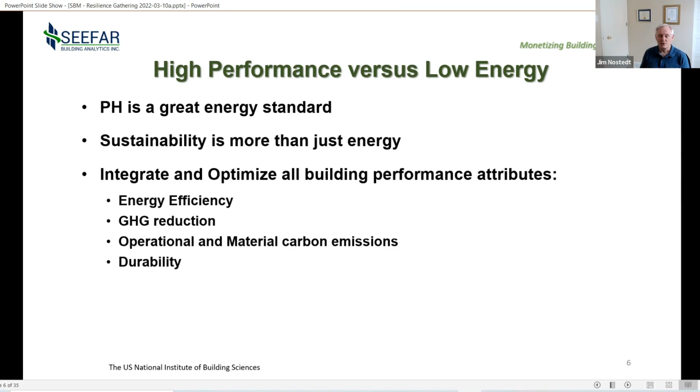So sustainability is more than just energy, but what we really need to do is integrate and optimize all building performance attributes, energy being one, greenhouse gas reduction, operational and material carbon emission reductions, the durability of the materials that we use for the building, the maintenance and renewal costs, the life cycle performance, how long is this building going to last, and how long are the materials that we're using going to last. And if we're deconstructing a building to build this, we should think about that. And finally, I think one of the most important ones is occupant comfort and productivity.

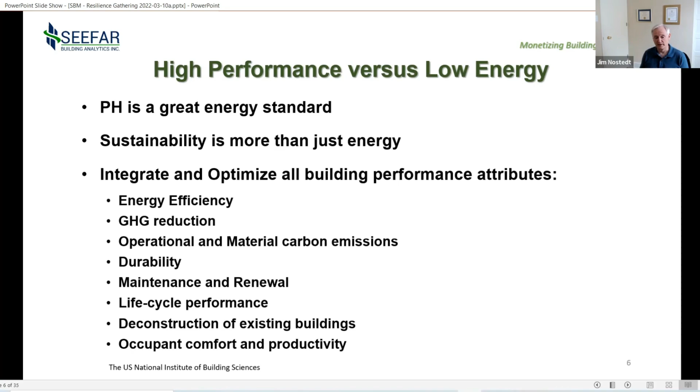And because the occupants, or the people that work in the building, impact the building in a big way, but the building also impacts them. So what are the objectives of our SEEFAR valuation? Well, first of all, to optimize the whole building investment, reduce the material and operational carbon emissions, reduce the total cost of building ownership. And what we're going to see is that new high performance buildings have much higher value than code built, and also that deep retrofits can achieve net zero ready with higher value than the existing buildings over their remaining useful life.

So who wins? So what are the benefits to the building owners of this? Well, if you have a $1 million building and it has a 60-year life, you're going to spend $7 to $10 million in operating and maintenance costs over that time period. We know from experience we can address about 3 million of that $7 million. And I think there's more opportunity there if we work at this a little bit. And what we see is that we can save 30 to 50% of that $3 million, which is roughly $1 million over the 60 years. So you spent $1 million to build the building, you're going to save $1 million in life cycle costs over 60 years. Pretty significant savings.

What occurs in addition to that is that you have protection from future utility rate increases and rising carbon prices. Your building should have a higher asset value that outperforms new code built buildings or existing buildings. And there's still more potential savings here that we haven't investigated. And I think that will come with more experience as we do this.

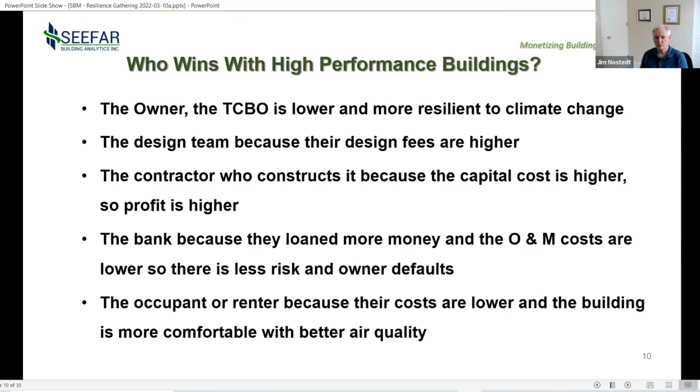The bank wins because they've loaned more money and the O&M costs are lower, so there's less risk and less chance of owner default. And in a few minutes, Dennis Cunningham is going to talk about borrowing for green or high performance buildings. And certainly the occupant of the building or the renter wins because their costs are lower, but they've got a building that's more comfortable with better indoor air quality. And certainly the planet wins.

So I'm going to give you an example. This is a building in Ontario. It was built as a code-built building. It's a good-sized building, almost 21,000 square meters. It was designed as a code-built building for about $58 million. The owner said, well, what if we made this a passive house building? That bumped the cost to $58.6 million, which is about a 1.2% premium. And then if we added solar panels on it, it'd be a 4.8% premium. So what we're doing here is we're comparing the base case code-built building to a passive house design building, and then a passive house building with solar.

And if you look at the life cycle cost, the 60-year total cost of building ownership, you say with the passive house, we've saved $45 million. And then if you added the solar panels on, that savings goes to 73 million. Just think about this for a second. You invested $60 million and you got back $73 million in savings. Very, very significant.

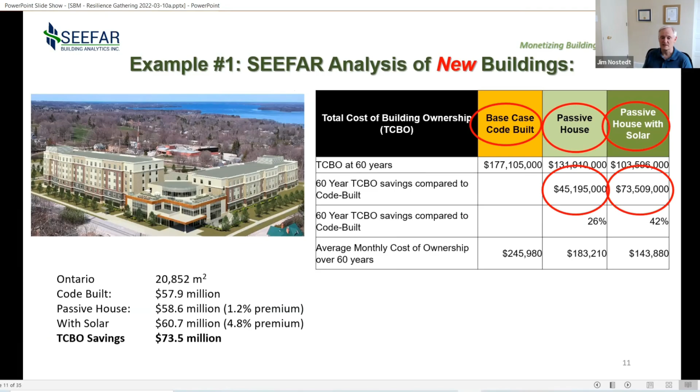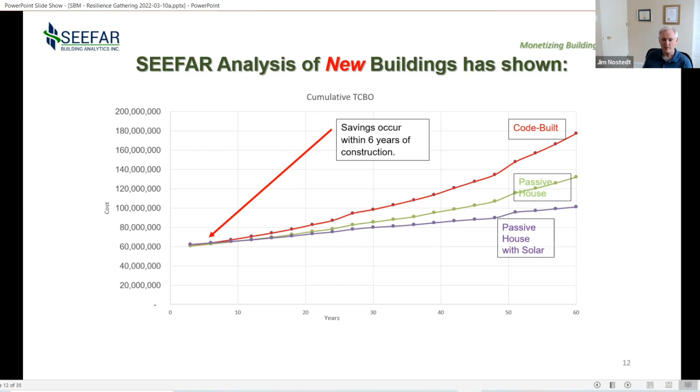Now, that's highly unusual. In this case, the builder was building this home for himself. He put a lot of extra care into it and made a pretty substantial building. But let's look at the results. Again, we're going to compare the code-built building to the high-performance building.

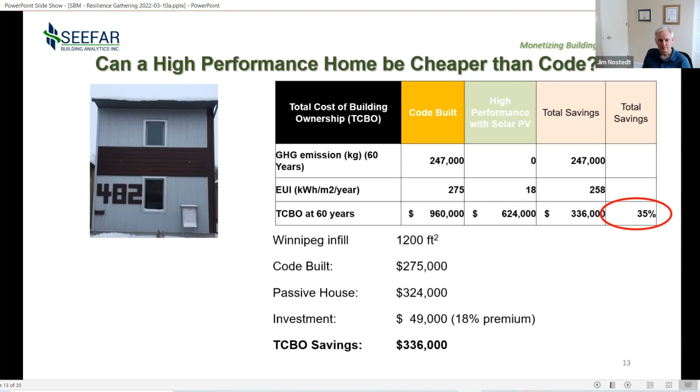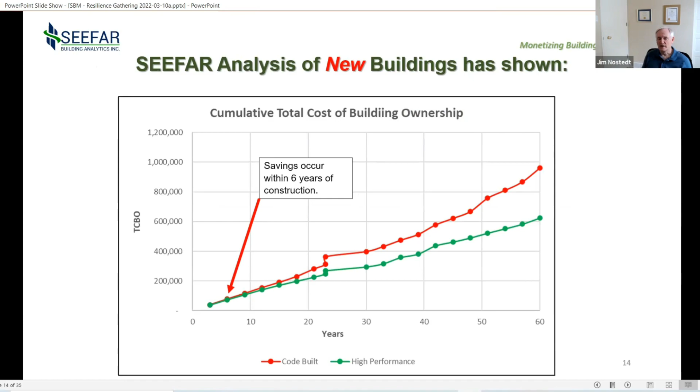So far we've just talked about new buildings. Let's go and look at the situation with existing buildings, because existing buildings are the big problem. I think the number is something in the order of 15 million single family homes that need to be retrofitted, and that doesn't include commercial buildings.

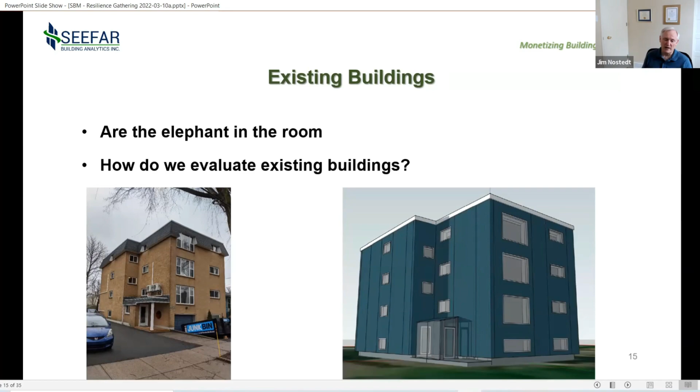So let's look at the numbers. So again, comparing the existing building to the deep retrofit. We've reduced the greenhouse gas emissions essentially to zero, the energy to zero, but let's look at the savings. We've saved $1.5 million or 37% over the life of the building.

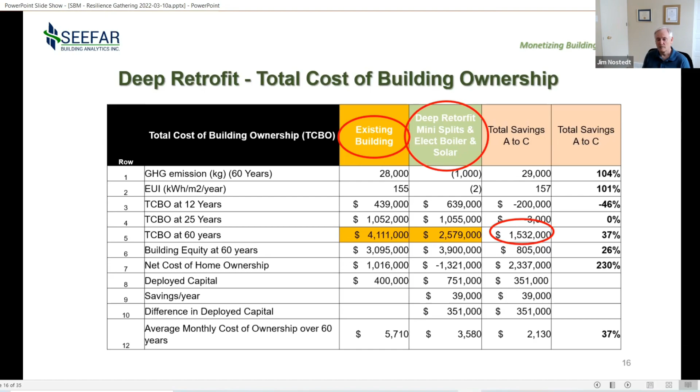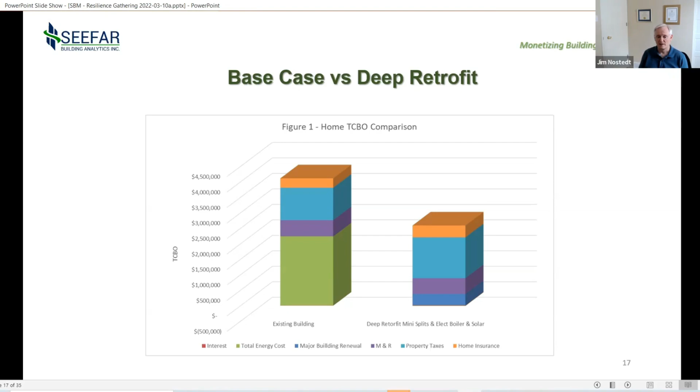And the other costs have gone up slightly because we've had to maintain the solar panels and those kind of things. And the property taxes, we've shown an increase, but that's not always necessarily the case, depending on the jurisdiction. But pretty substantial savings.

Well, let's look at the total cost of building ownership curves. Again, the red line is the existing building and the green line is the retrofit. But notice these lines are not crossing until year 27. We still saved $1.5 million or 37%, but people say, well, I don't want to wait that long to achieve the savings. So let's look at another example.

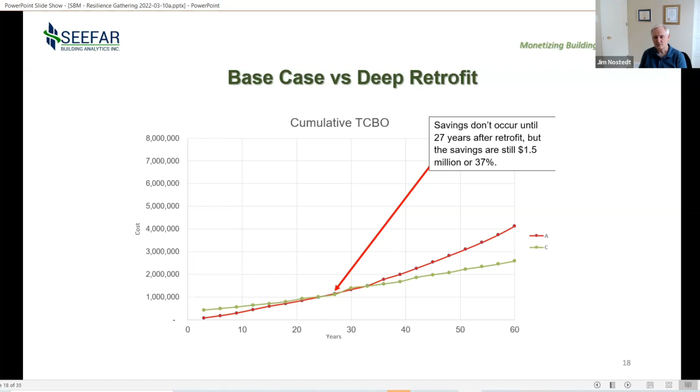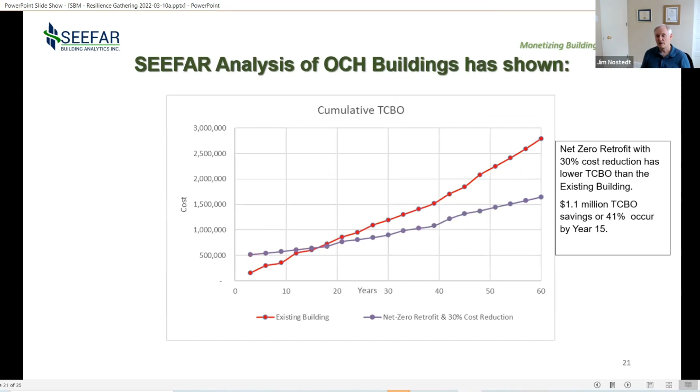And so we went back and we looked at this building and said, where can we save money on this construction process? Because it was a very first project, a pilot project, and initial costs were pretty high. And what we found was that by looking at each individual building component, we could probably save in the order of 30% of the construction costs.

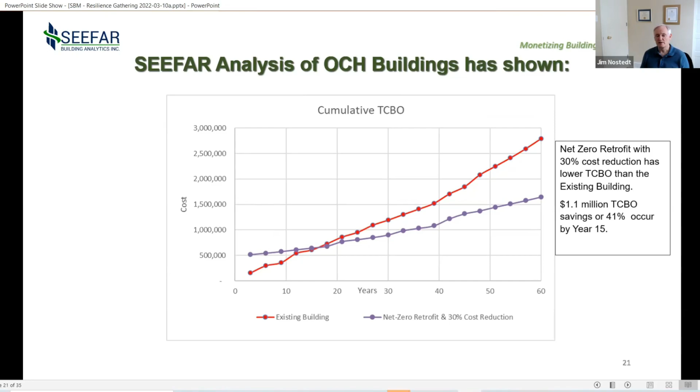And that increased the savings to 1.1 million, and it brought where the curves cross down to year 15. And what we have not included in this analysis at this point is the improved value of that building. And we believe that we can get below 10 years if we take that analysis into account.

So what did we gain out of this? Well, first of all, adding the solar panels to the deep retrofit saved $1.5 million over the 60-year total cost of building ownership. But the order of optimization is important. And the first thing to do is reduce the building load by adding the panels on the outside and then using more durable products to do that. And we've realized in this, and I've shown the example, that we need to reduce the cost of the retrofits. And we see that that's possible.

The next thing is you want to get off fossil fuels. That means electrifying, but it also means that you're probably going to end up using heat pumps because that will reduce the energy costs. Natural gas is about 1/3 of the cost of the electricity, and because you have a coefficient of performance of 3 to 4, the heat pumps will bring you back to reducing that cost. And now you've reduced your greenhouse gas emissions essentially to 0.

And then the last thing you do is add the solar panels on. And the reason you add those last is you've reduced the building load dramatically. That means you need less solar panels, which have less capital cost, but it also means there's lower operating and maintenance costs. And you need to start this optimization process at the beginning of the project. The earlier you start it, the more opportunities you have to reduce the costs.

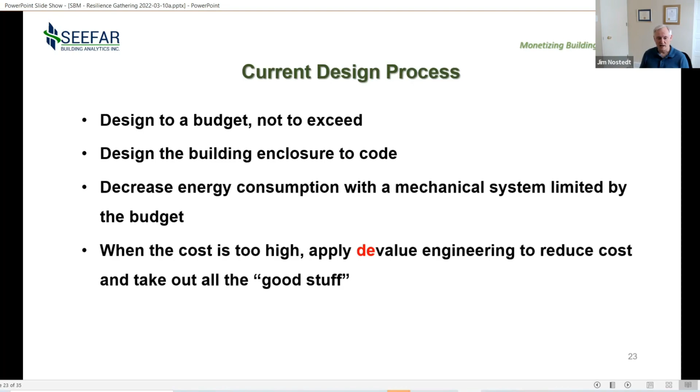Also wanted to talk quickly about the design process that is currently going on. Most people are designing to a budget not to exceed. They're typically designing the building enclosure to code. And then what they do is they try and decrease the energy consumption with a good mechanical system, but that's always limited by budget. And if the cost gets too high, they apply value engineering to reduce the cost, and they take out all the good stuff. And I really call it devalue engineering, because most of the time they're taking out things that would actually reduce our energy consumption and our greenhouse gas emissions and our maintenance and operating costs. At the end of the day, the owner gets a building that meets his budget, but he has high operating and maintenance costs that increase forever based on the escalation rate of energy and maintenance costs.

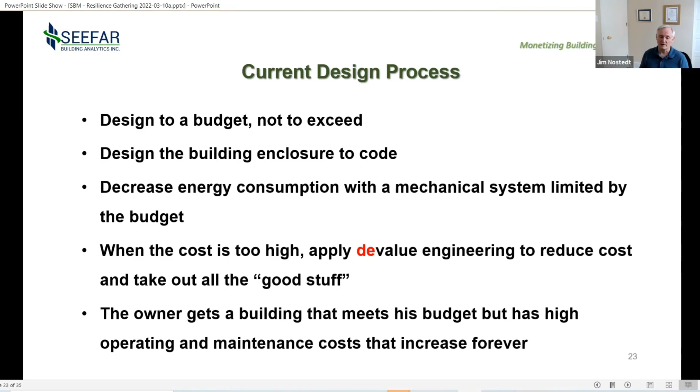What we really need to do is educate the design teams about total cost of building ownership. We need to change the thinking from low first cost to low life cycle cost. And we need to give the design team a big goal. And I think that goal should be net zero energy or net zero carbon, which is a little more challenging yet. We need to start using integrated project delivery. A more collaborative approach gets better results. And you need to use the total cost of building ownership analysis to optimize the design. And you got to start that optimization process at the concept stage.

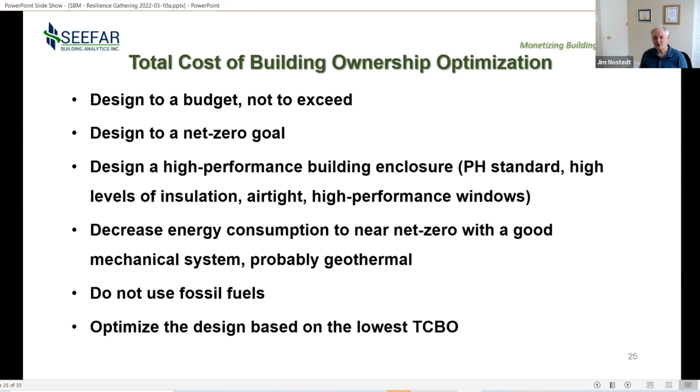So what is this total cost of ownership optimization? Design to a budget not to exceed, that can stay. But we need to design to a net zero goal. We need to design a high performance building enclosure, at least passive house standard, with high levels of insulation, airtightness, high performance windows, etc. And we need to decrease the energy consumption to net zero with a good mechanical system, probably geothermal. And we need to stop using fossil fuels, and then optimize the design based on the total cost of building ownership. And then enjoy the savings.

So in conclusion, what we're seeing is that this total cost of building ownership system is proven to work. It reduces the total cost of building ownership of both new and existing buildings, and it can be used to optimize the design. And high performance and deep retrofits of buildings have a 30 to 50% lower total cost of building ownership. And that's all, and I'd be open to questions.

So the first one we have here is, have discounts, interest rates been taken into account in financial decisions? Yes, they have.